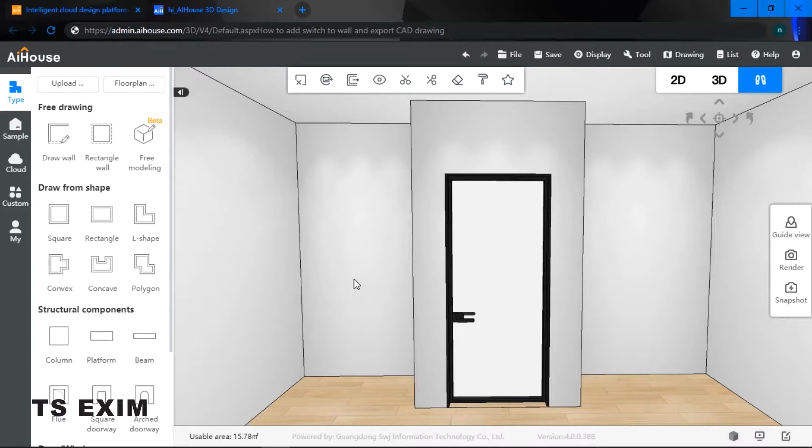So go to your cloud. Select electronics and then click on switches. Alright, so we are going to add a switch right over here. Just drag your switch. If you would like to adjust, click on C and adjust the placing.

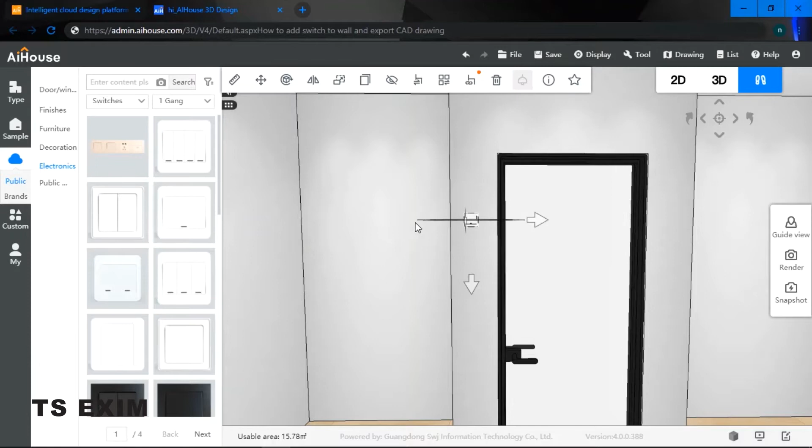1450. Okay, so maybe we'll add a socket, right over here at the corner. Same thing, if you would like to adjust, click on C to adjust 150. Right over here, probably I'll put 100.

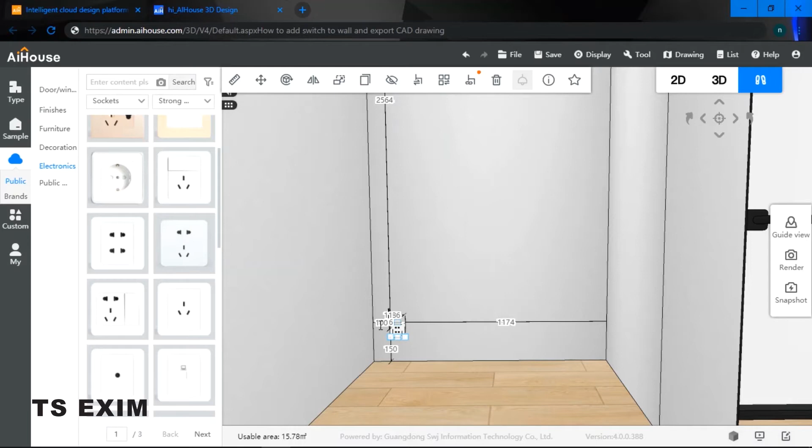Alright, so right now I have a switch and I have a socket. If I would like to export them to my CAD drawing, come right on top here.

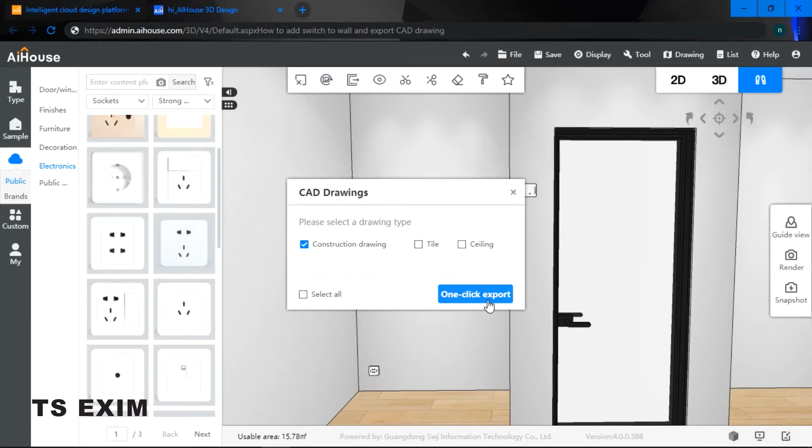AiHouse, CAD drawings. You may untick this too. Just tick the construction drawing and then click export.

Save it to your locals and then just open it up on your CAD software. As you can see, I'm using the Trimble Connect.

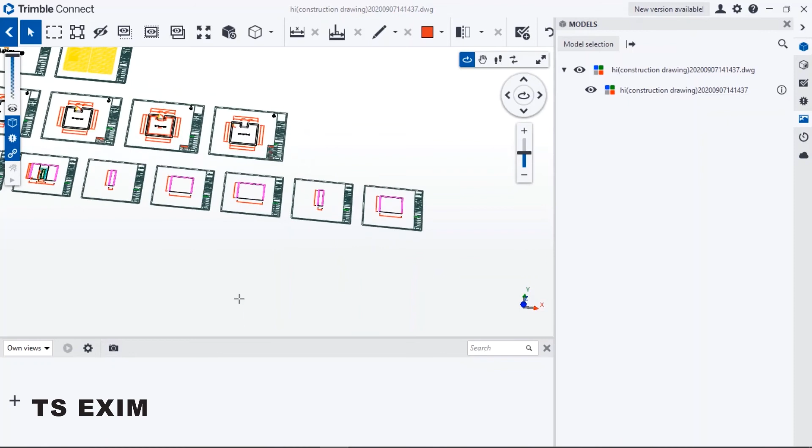So with just one click, you may export your 2D drawing. And if you would like to check your socket and your switch, it will be right here.

Right, so as you can see, this is my switch. The dimensions are all shown. And this is my socket. Alright, so it auto generates.

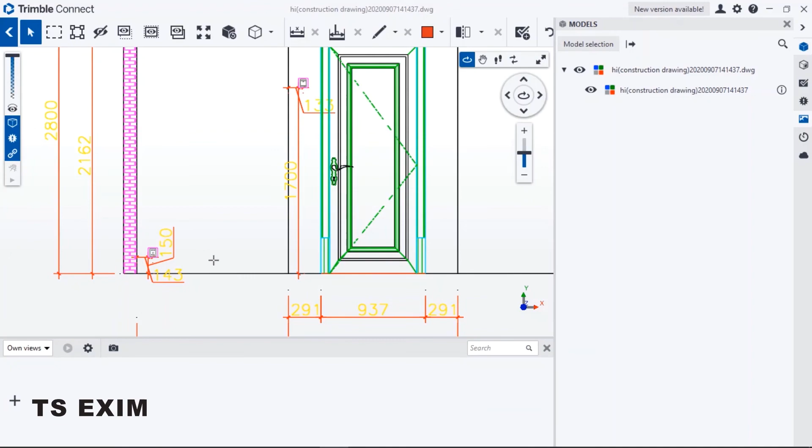So this is how you add a switch and export a CAD drawing. Good luck trying, guys.